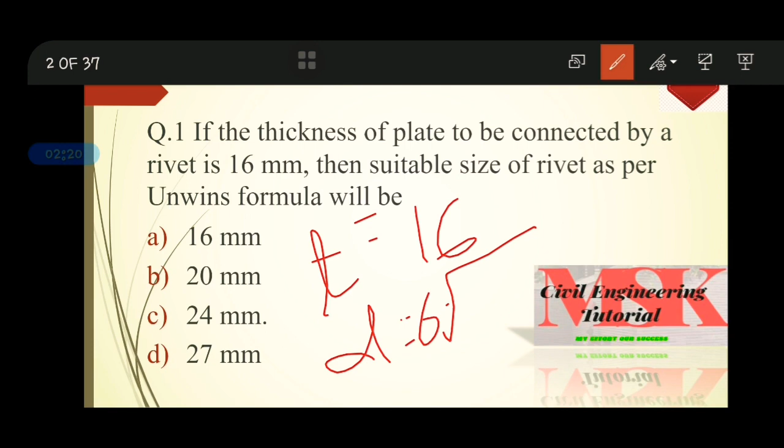Question number 1: if the thickness of plate to be connected by rivet is 16 mm, then the suitable size of rivet as per Unwin's formula is? Friends, as per Unwin's formula, diameter of bolt d is equal to 6.04 times root over t. Here t is given as 16, therefore the answer will be 24 mm.

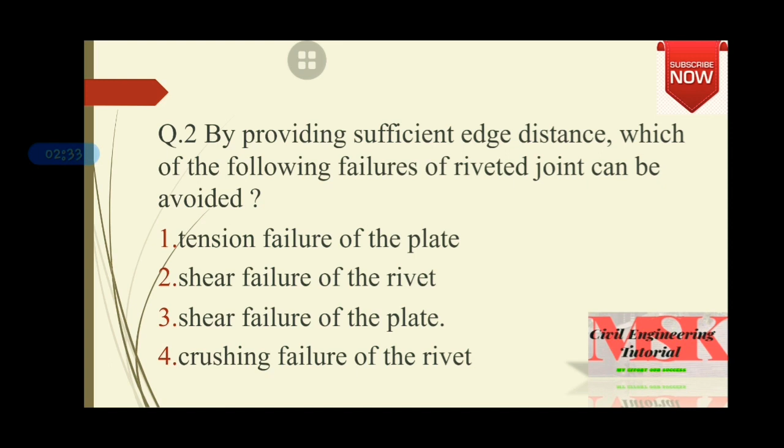Next question: in a connection, if we are providing sufficient edge distance, then which failure will be avoided? Option 1, tension failure. Option 2, shear failure of rivet. Option 3, shear failure of plate. Option 4, crushing failure of rivet.

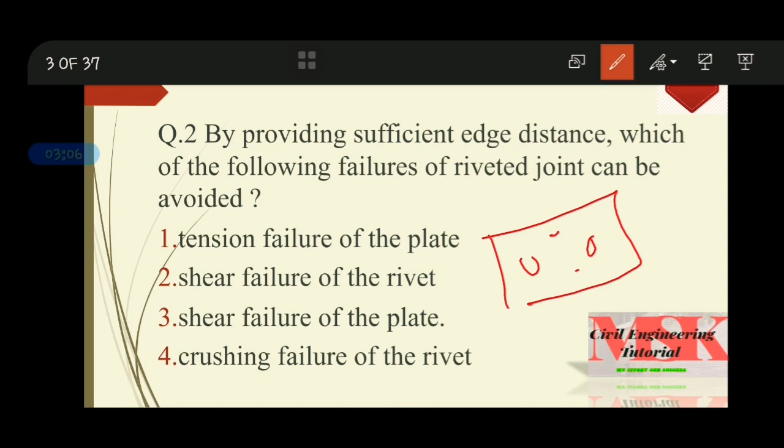Next question number 3: minimum pitch of rivets shall not be less than. This question is directly from the specification, therefore the answer will be option 3, 2.5 D.

Next question number 4, efficiency of a riveted joint having minimum pitch. The efficiency will be 60%. Next question, select the correct statement.

Option 1, material cost of a rivet is higher than that of bolt. Option 2, tensile strength of bolt is lesser than that of rivet. Option 3, bolts are used as a temporary fastening, whereas rivets are used as permanent fastening. Option 4, riveting is less noisy than bolting.

So friends, this answer will be option 3: bolts are used as temporary fastening and rivets are used as permanent fastening, because we can open a bolted connection, but we cannot open a riveted connection since it is fastened by hammering.

Option 1, shearing. Option 2, bending. Option 3, axial tension. Option 4, shearing and bending. The correct answer will be option 3, axial tension.

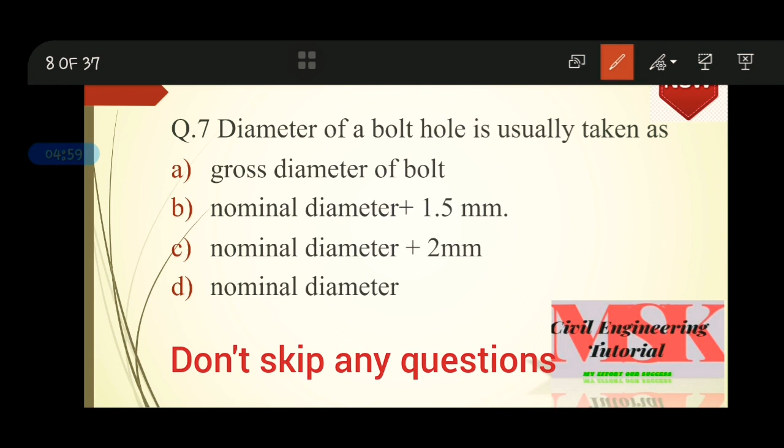Next question, diameter of bolt hole is usually taken as: option 1 gross diameter of bolt, nominal diameter plus 1.5 mm, nominal diameter plus 2 mm, or nominal diameter. The answer will be option 2, correct. Option 3 is correct when the bolt diameter is more than 25 mm.

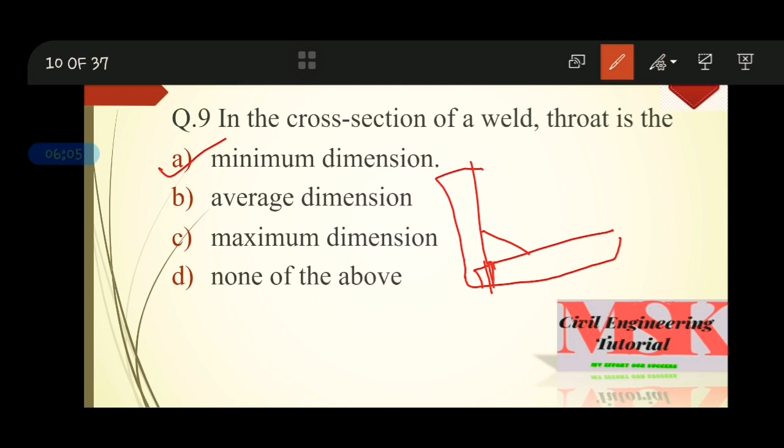Next question number 9: the cross section of a welded connection throat is - option 1, minimum dimension; average dimension; maximum dimension; none of these. Friends, this answer will be minimum dimension. If this is a welded connection, then this will be its throat.

Question number 10: the effective length of a fillet weld should not be less than - option 1, 2 times size of weld; 4 times size of weld; 6 times size of weld; option D, weld size. Friends, this answer will be option B, 4 times size of weld.

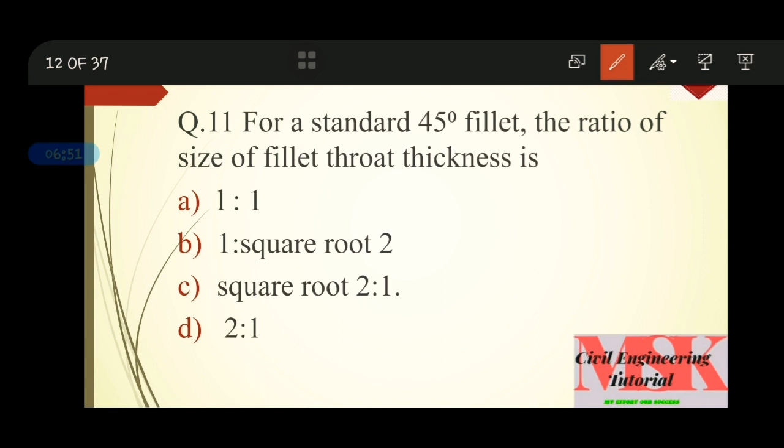Next question, for standard 45-degree fillet weld, the ratio of size of fillet weld to throat thickness is - option 1, 1:1; option 2, 1:square root 2; option 3, square root 2:1; option 4, 2:1. The correct answer will be option 3, square root 2:1.

Next question: a butt weld is specified by - option 1, effective throat thickness; option 2, plate thickness; option 3, size of weld; option 4, penetration thickness. The answer will be option 1, effective throat thickness.

Next question number 13: the actual thickness of butt weld as compared to the thickness of plate is usually - option 1, more; option 2, less; option 3, equal; option 4, none of the above.

Friends, this is called butt connection. If we are providing butt connection, butt weld in welding, the weld size is usually more than the thickness of plate.

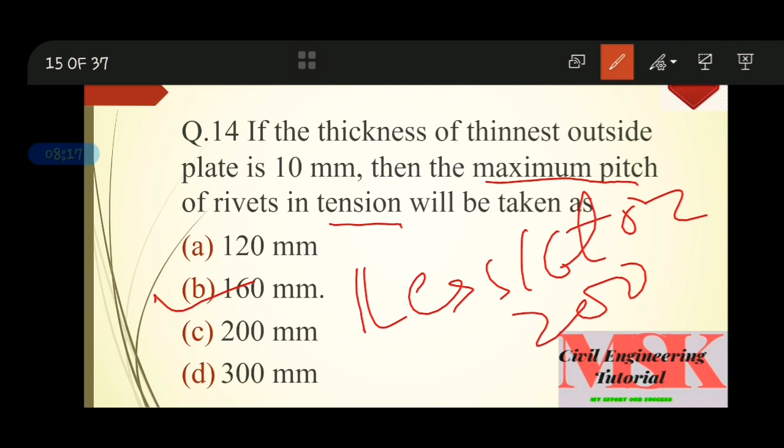Question number 14: if the thickness of thinnest outside plate is 10 mm, then maximum pitch of rivet in tension will be. Friends, maximum pitch in tension is lesser of 16T or 200 mm, that means 16 into 10, 160 mm, or 200 mm, whichever is less. So option B is the correct answer, 160 mm. If this is provided in compression, then it will be 12T or 200 mm.

Next question. When the axis of load lies in the plane of rivet group, then the most heavily loaded rivet will be one which: option 1 is at CG of rivet group, option 2 is at minimum distance from the CG of rivet group, option 3 gives the maximum angle between two forces FA and FM, option 4 gives minimum angle between two forces FA and FM.

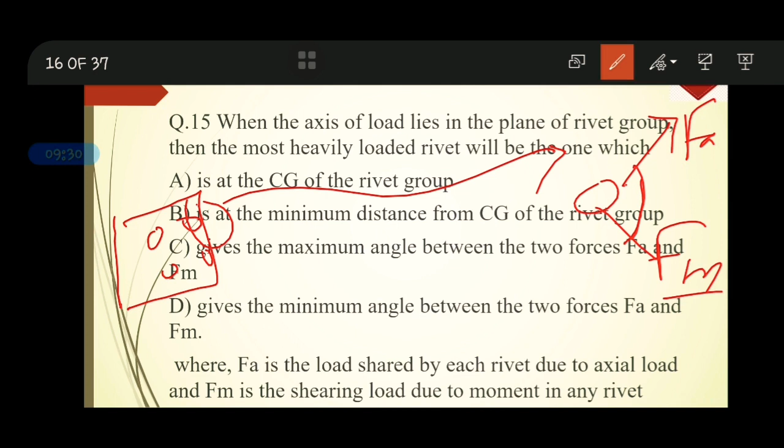As per question, if these are the bolts, I am taking one bolt here - this is FA, this is FM, this is the load shared by moment, this is the load shared by axial load. According to the question, how will the load carrying capacity be maximum? If the angle between FA and FM is minimum, then the load carrying capacity will be maximum. So option D is the correct answer.

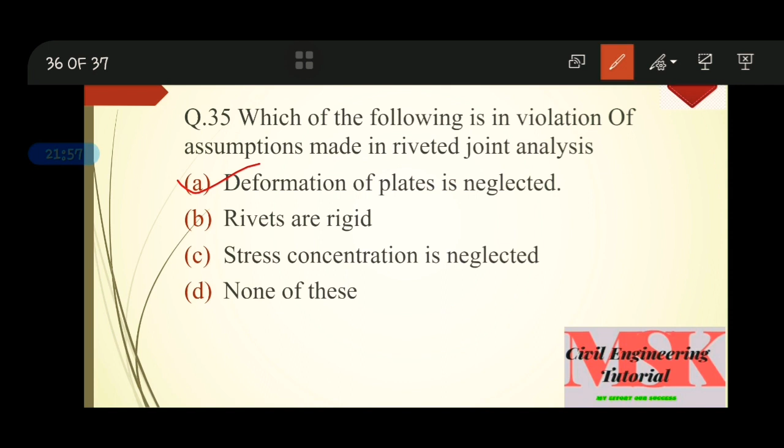So friends, this is the last question of part 1.